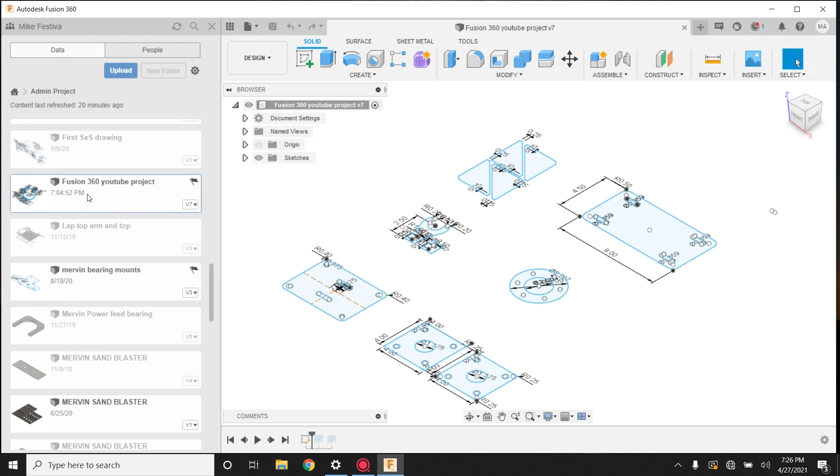Alright, so I just opened up Fusion 360, like we're just starting off, and we had some existing files. We're going to access those files right up here, show data panel, and here we go. This is a file. Left click twice on it. There's our existing file we already had. You're going to hit top view over here, and if for some reason you hit the wrong button, you can turn it. We're actually looking straight onto the file, so you can use these arrows over here to figure out where you're at and rotate it, things like that.

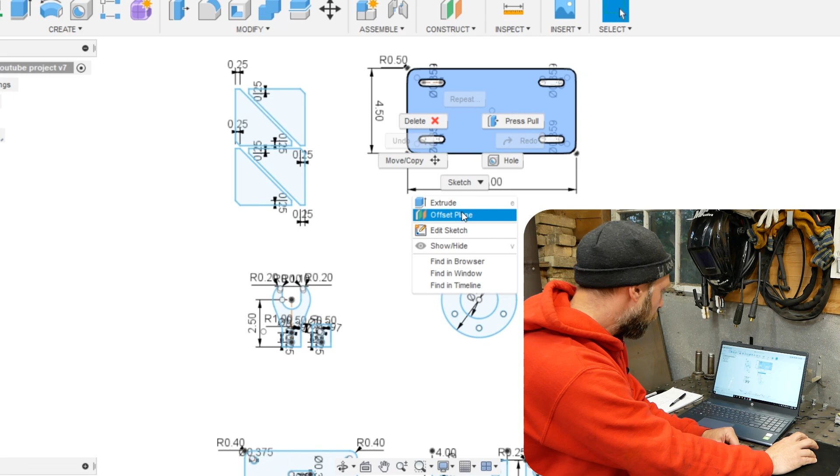So here's some existing files we already had drawn, and what we want to do now is go over on top of any of them, right click once, and go down to edit sketch. We push that. Now we can actually change dimensions on these parts and draw them up. This is the flange we're going to actually draw. 6-bolt flange. So we're going to go over here to our tools.

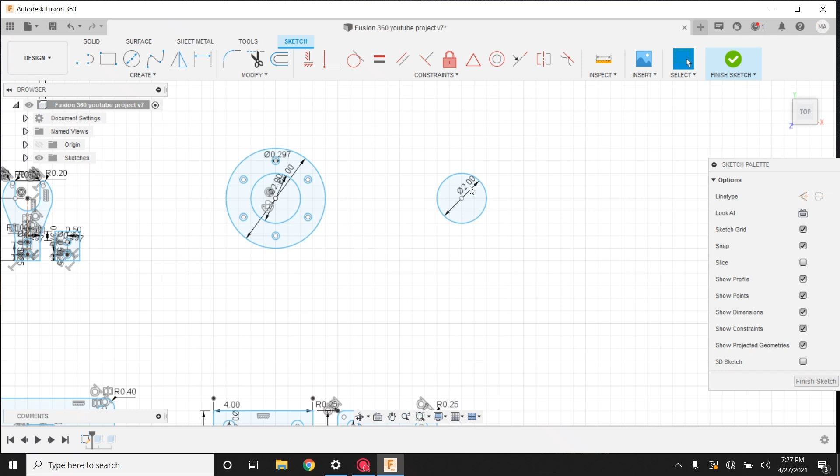We're going to go for center diameter circle. Click that. We're going to come over here, and we're going to make that 2 inches. Push 2 and then enter. And then we're going to go over to our line tool, and hit X to create a construction line rather than a drawing line. Zoom in a little bit. We're going to come up 1.5 inches. Enter. Then we're going to use escape to take that tool off.

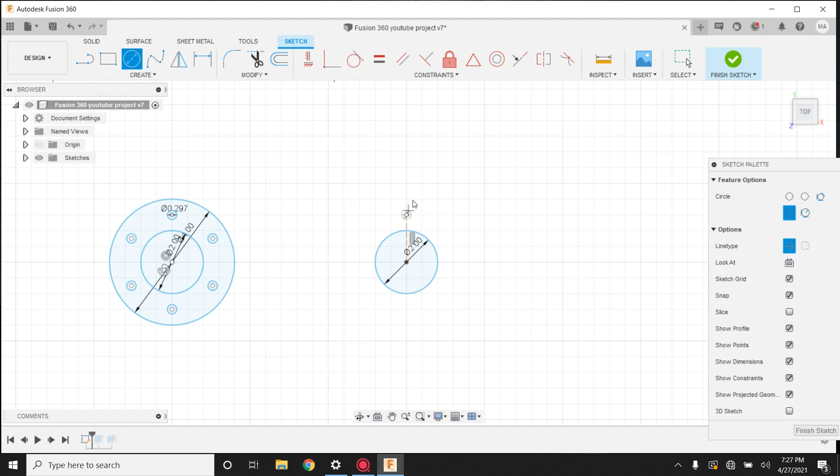And then we're going to go to the center diameter circle again, right on that little end point of the construction line. Backspace, 0.297, enter. We don't want that construction line for the future, so we're going to click on it, and we're going to hit X. Now we got a draw line. That's good.

Now we're going to go up to center diameter circle again, click on the center, pull it out to whatever you want. We got a construction line again. I need to toggle that off later. We want to do 4 inches, 4, enter. Click on that. There we go.

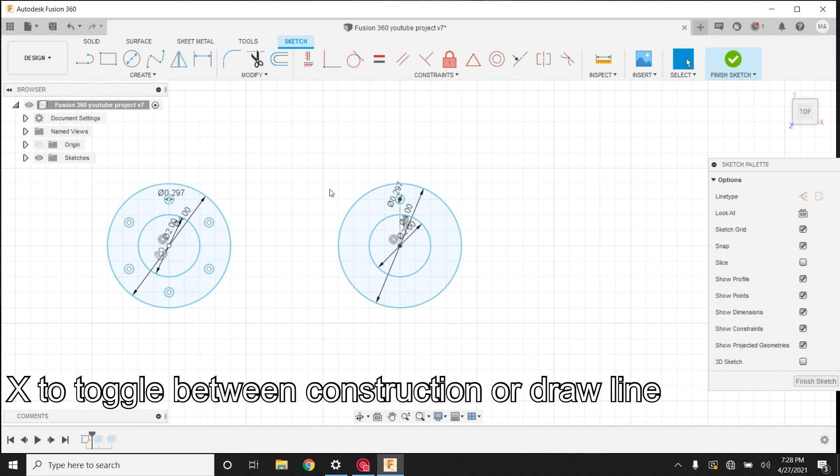So now we're going to go down to the drop down to create. We're going to go down here. Last time we used a rectangular pattern. We're going to go to circular pattern. Click on that. Now over here it says object, center point. So we actually want to highlight this first circle we made up here. That's going to be our object. And then we're going to select center point.

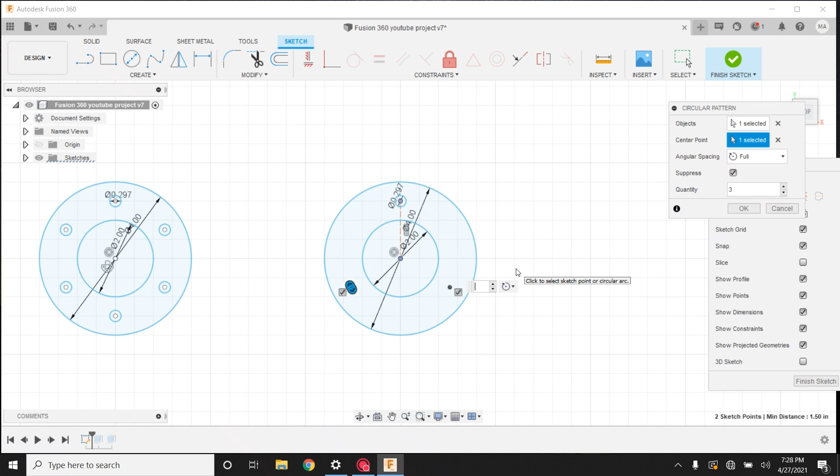And select that there. Now how many holes do we want to have in this flange? It's set for 3. Let's do 6 here. Simple as this. Hit 6. There's our array of 6. Now we can hit enter or OK.

Okay, so what happened there was it actually just highlighted the center points. We don't want just the centers on there. We'll go back through that again. I'll show you what we did different here. Circular pattern. Want to highlight just the outer ring of this. Okay, select center point.

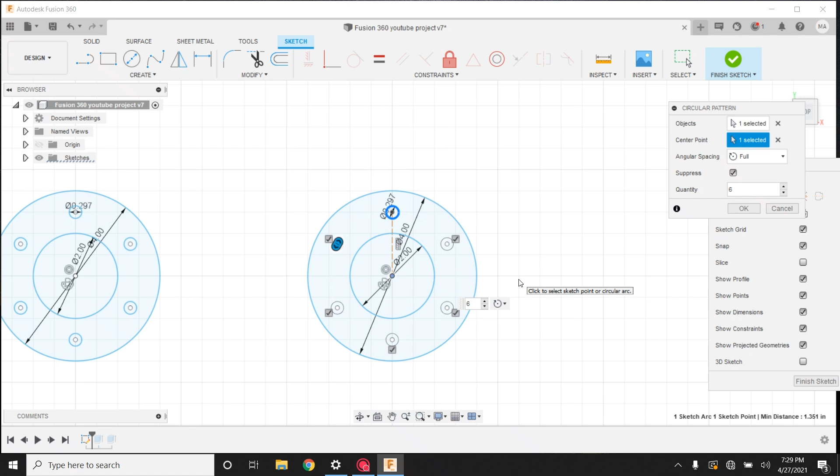Gonna go for 6. There we go. Now we just hit enter or OK. There we got our hole pattern. So that's as simple as that.

We can go back through and push T for trim. Left click, trim that off there. Trim the other construction line. Just kind of cleans up the drawing quite a bit. So there we got a flange. Hit escape to take that tool off.

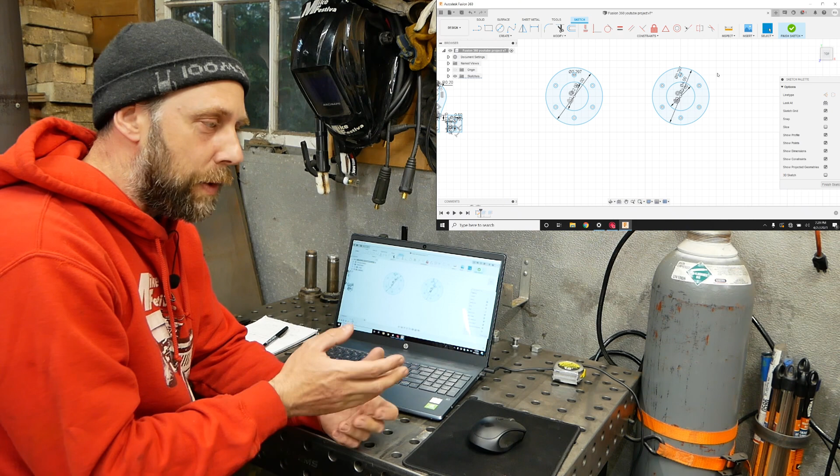Simple as that. So as you can see, you can make simple little wheel spacers if you're working on a project or a quad or anything. You want to make some 1/4 inch wheel spacers for bigger tires or wheels on a car or anything. Hydraulic tank flanges, whatever you want.

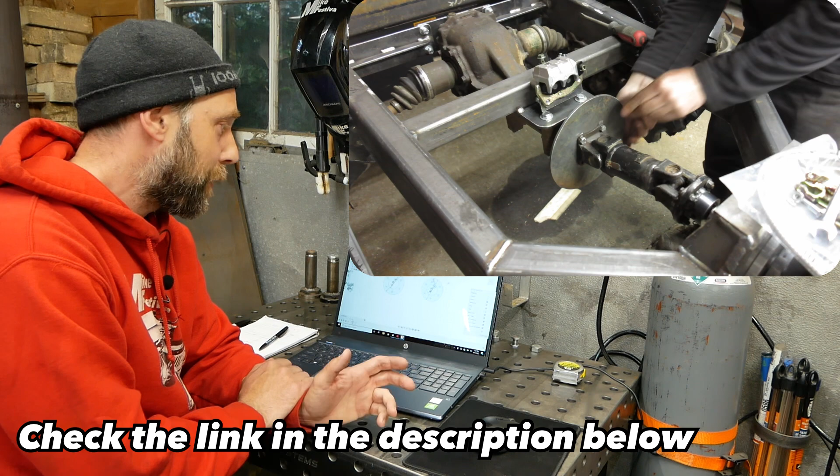It just gives you the idea how to use the center tool here for circular patterns, the hole patterns, and you can put any number of holes from 3 on up, I think. So it's a pretty useful tool, and I've used it quite a bit.

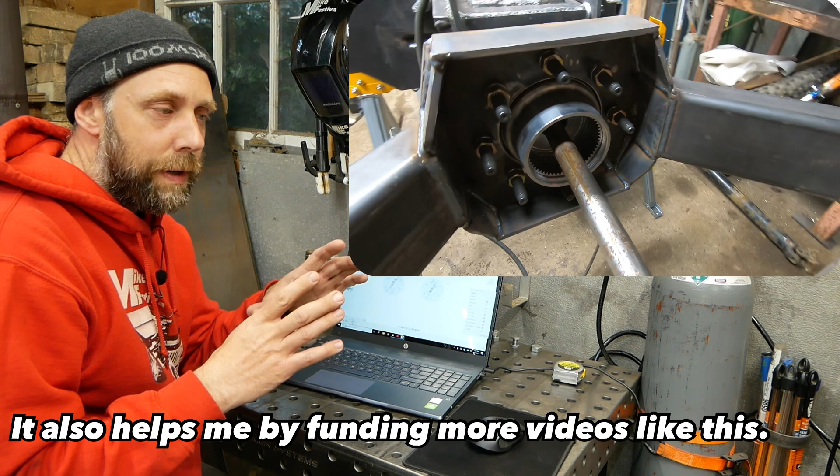I used it for actually making the center point for the articulated dump truck, because I used a Ford F350 center bearing. So I had to cut basically what would be the pattern of a wheel pattern for that. And it worked out great.

All right, we will move on to another part here. We're going to start working on a Predator slotted engine base for maybe a go-kart chassis or anything like that if you want to mount a 6.5 horsepower engine on. So we'll get to that next.

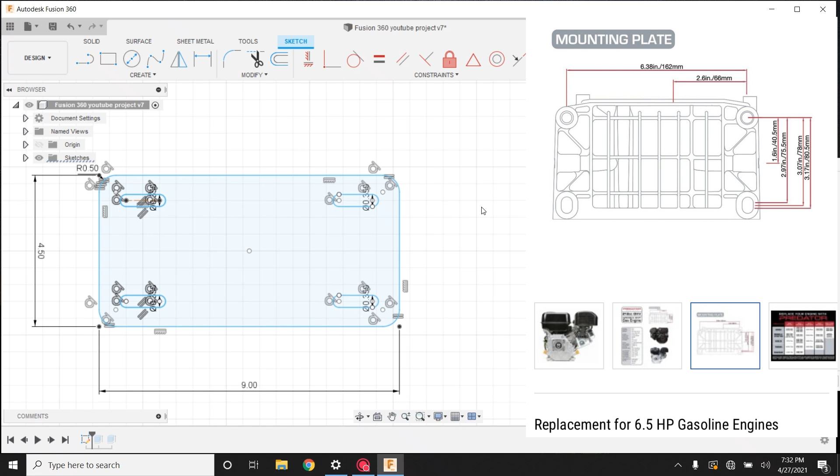Okay, so here's the part we're going to draw now. It's an engine plate for a Predator engine. I got on the Harbor Freight website and they actually had bolt pattern specs, and it was 6.38 inches by about 3 inches. So we're going to make a slotted engine plate that will support an engine if you're working on a go-kart or anything.

So we're going to go over to the side. We're going to go up to create, and down to slot. Center slot is the one we want. So we're going to go over here and left click. Going to bring this out to 1, enter. Now you don't see a slot on there. That's because we got to open it up and widen it here.

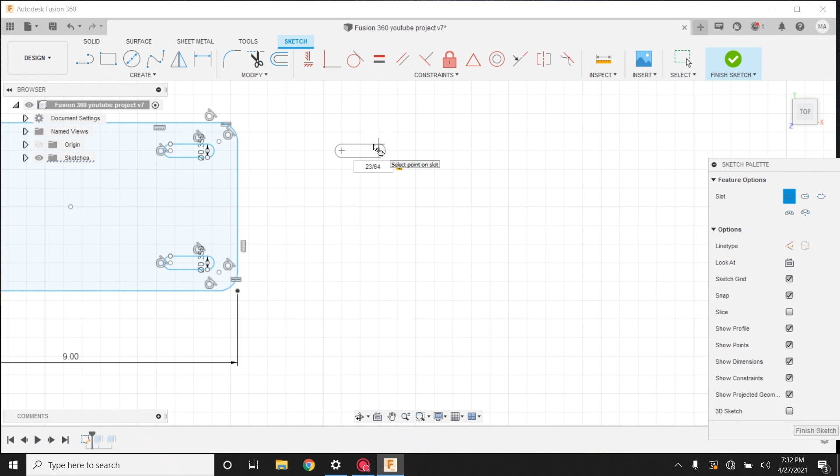So what do we want to make this? I think we're going to make this 23/64ths. Enter. Now we got that first slot there. Now what we're going to want to do is actually copy it and move it over.

So we're going to zoom in here, and left click on that once. Now we're going to right click it once we highlighted it. We're going to go to move. We're going to highlight every one of these 4 parts. Now we're going to hit copy, and move it over in this direction.

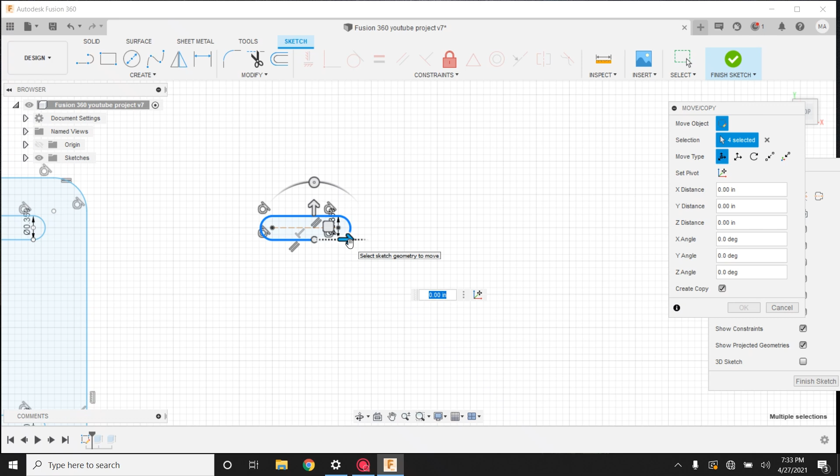And we're going to move it over 6.38 of an inch. So 6.38, enter. Now we got a slot moved over here. So now we're going to highlight all these, and we're just going to copy up.

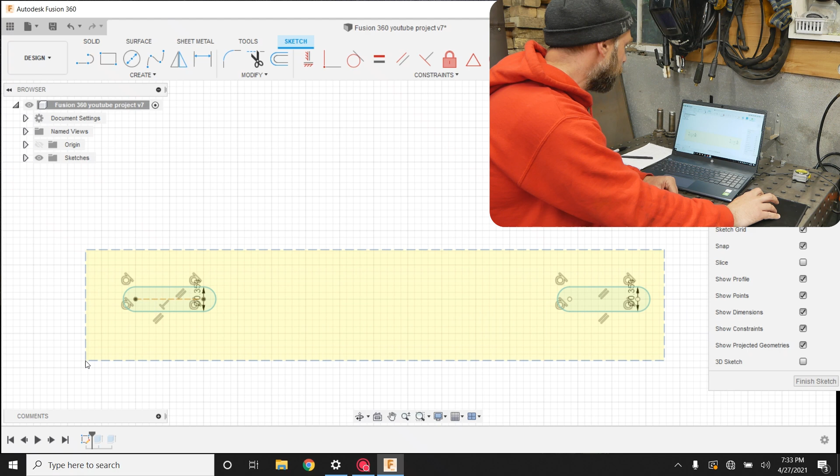Instead of clicking 8 individual pieces, we're going to left click and hold and drag and box these in. Now we let go, go over the part, and right click to move. Now we hit copy, then hit the arrow up, and we want to come up 3 inches. We hit 3, and then push enter.

So there we got our slot pattern here, which is super useful for building anything you need adjustments for belts or anything like that. So now we're going to make our overall engine plate 4.5 inches by 9. We're going to go over to the line tool, and hit X for construction line.

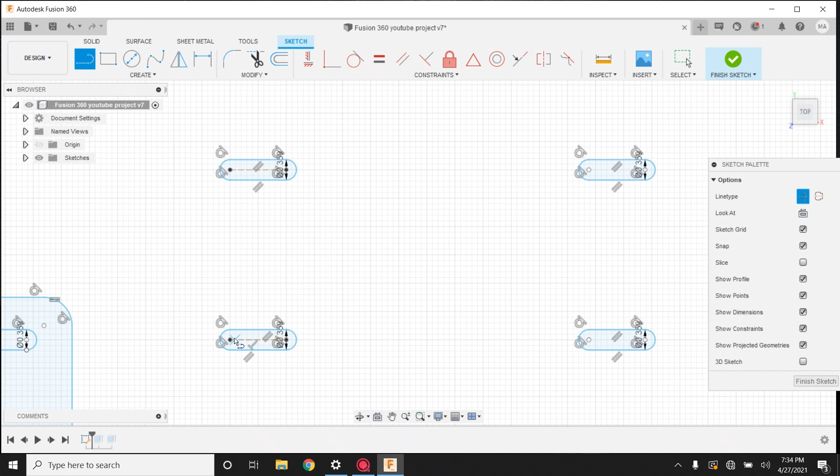We're going to come over to the side hole right here, and do a cross right to this. So we got a nice angle sloping from that hole to that outer hole there. Now we're going to hit escape to remove that drawing tool. And then we're going to go back to line again.

We're going to find the center. Fusion is pretty good because if you come up or down the center, we'll see that means we're in the center of that line. So I'm going to just drag this straight up. Anywhere in here is fine, and hit left click again. Now escape to take that tool off of there.

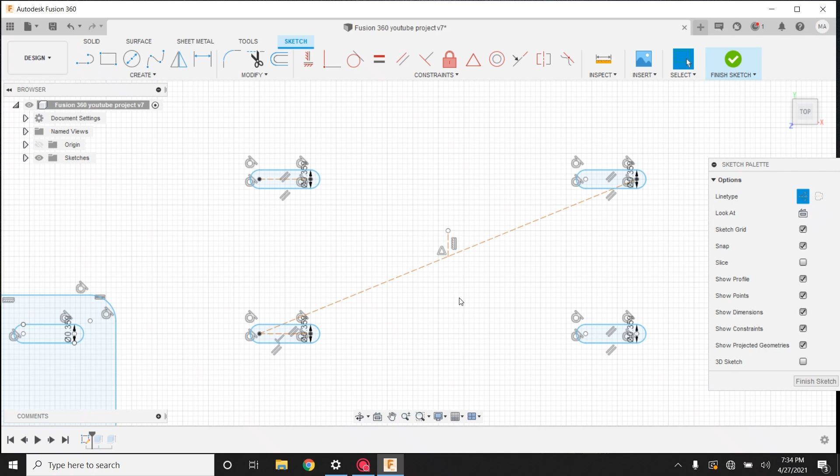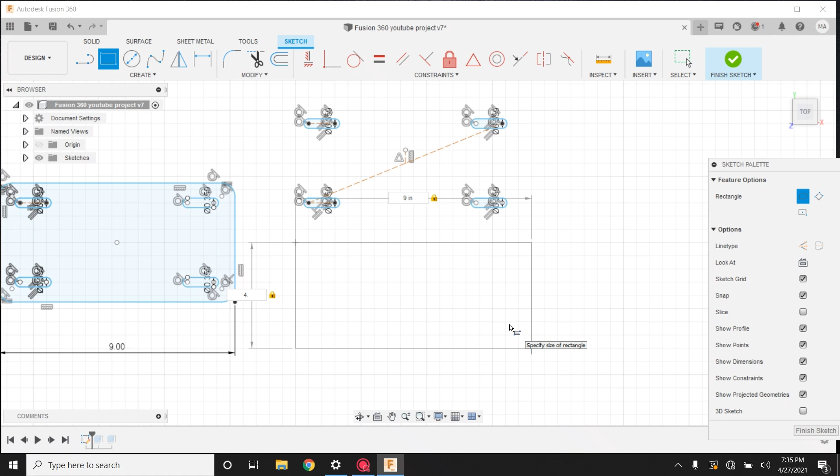Now what we're going to do is we're going to draw a rectangle. So we're going to draw our 2-point rectangle tool. Going to click on that. We still got a construction line on over here, so I'm going to hit X to take that off. I'm going to click anywhere around here. We're going to drag this out. We want it to be 9 inches, so we're on that box. We're going to hit 9, and now we're going to hit tab on the keyboard, and we're going to put 4.5, enter. Now we got that part there.

Now we got to get it over here. What we're going to do now is we're going to go back to create. We're going to go to point. And see, we just found the center of that line. We're going to want to find the center of this line. Once we do that and the computer recognizes it, we can bring it up and it's going to tell us where the centers of all those are. We're going to left click once. Now we added a little point there. Going to push escape. Now we're going to left click and drag over the whole entire box and then let go.

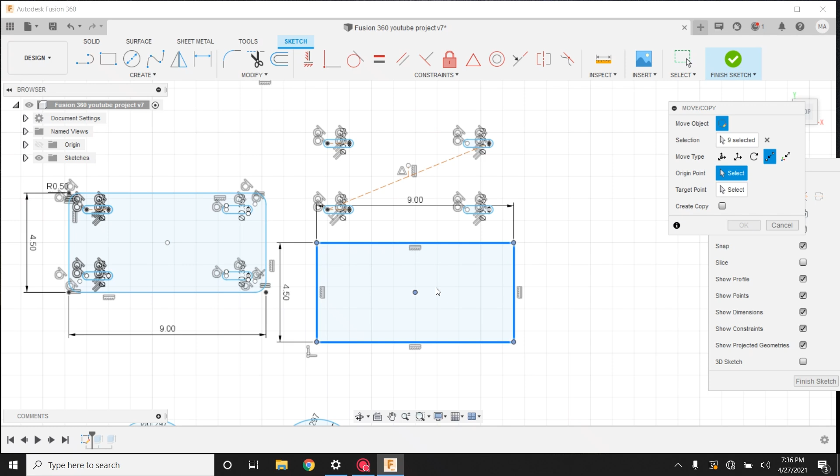We're going to push right click, move, and then up here we're going to want to go to this with the 2 dots and the arrow going down to them. Once we click on it, it says point to point. An origin point, we're going to select this one we just put on there, and then it instantly drops us down to a target point, where we're going to want to not hit that node right there. We're going to hit this one right in the center. There we go. We got the engine plate right over the slot, so we're going to hit OK.

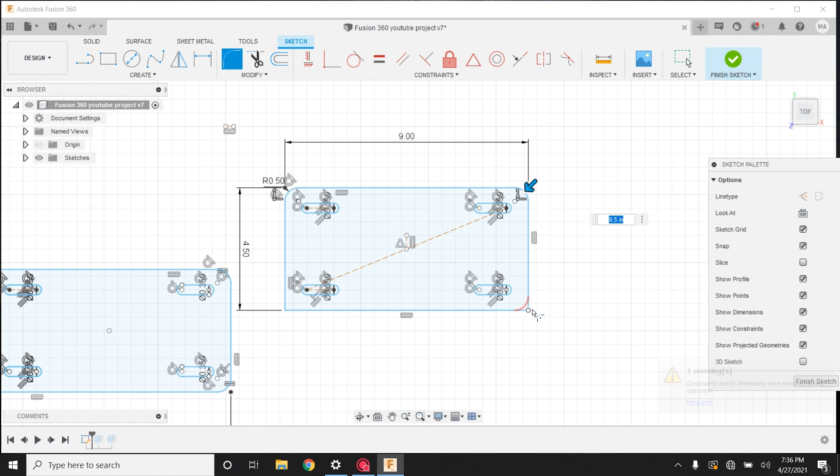Now last we want to do is come up here to fillet. We're going to fillet these corners. We're going to go over here, left click again, 1/2 inch. We're going to go around all the corners here. Keep clicking them, left click, get to the last one, left click, and hit enter. So now we got our engine plate.

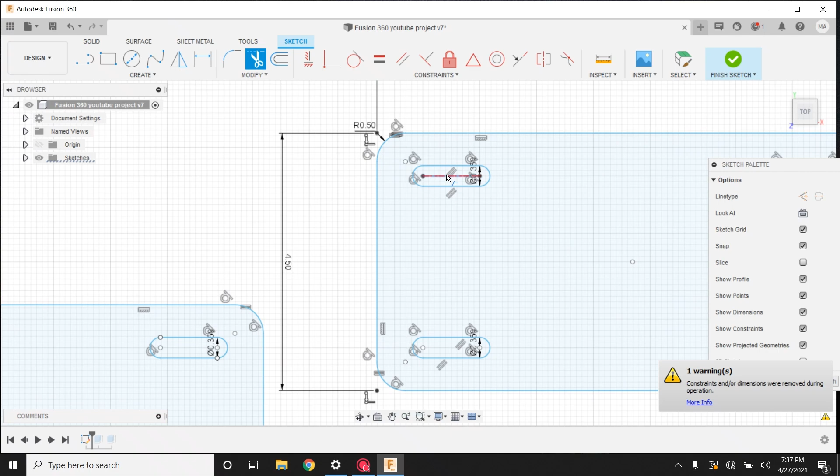Now we can just go through and use the T for trim tool. Trim these. As you guys see, I'm using more shortcut hotkeys because I'm thinking you are all probably using these by now a little bit, and if you're not, it speeds things up quite a bit. Here's one more thing. Clean that up. Now I'm gonna hit escape. Now we got our engine plate there.

So simple as that. Basically, you can bolt your engine on here and you can slide it forward and back 1 inch. If you want to slide it forward and back 1.5 inches, you just make the slots longer and make the engine plate a little bit bigger. Simple. I hope those little tools really help you out. And finally, we're going to get on to making some gussets, and I'll show you how I like to nest them, because sometimes you'll make multiple gussets on a project and you can nest them around your other parts, and it'll give you the simple idea how we do it. Let's get onto those gussets next.

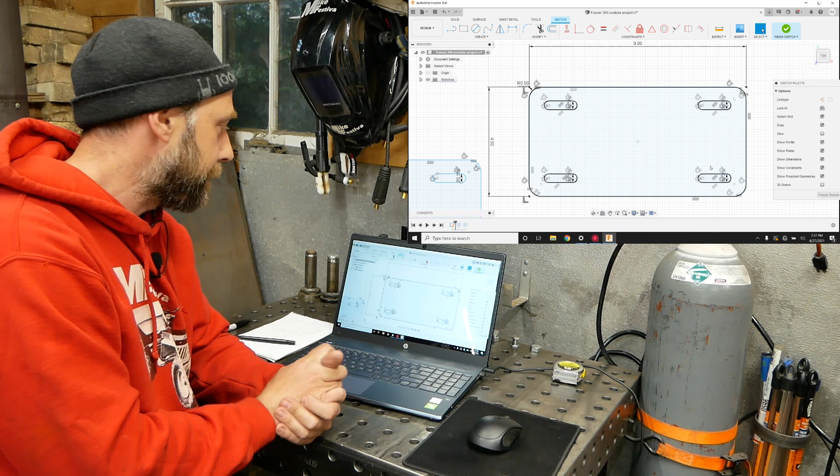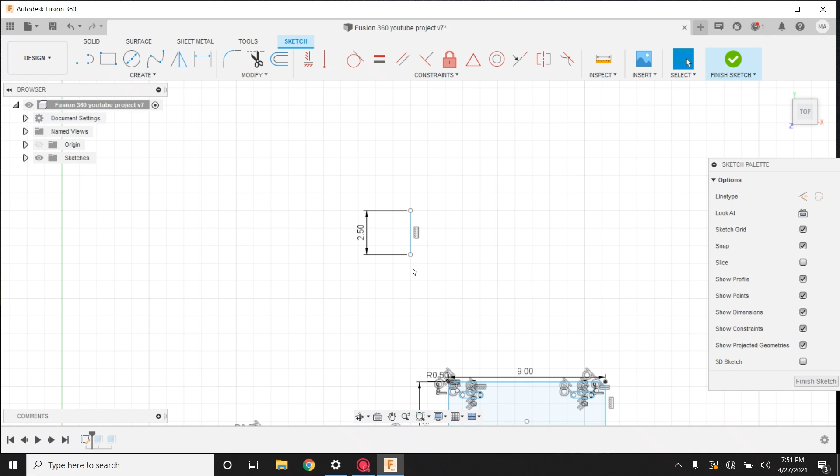Okay, so we're going to draw some simple gussets here, and I'll also show how to copy and paste them. I like to do this for nesting parts and other parts and pieces, so we'll get to that now. Going to go up to line, going to go anywhere on here, going to come down 2.5 inches, so 2.5, enter. I'm going to start using the hotkeys a little more. I highly recommend you start using them too. So instead of going up here for line, we're just going to start pushing L on the keyboard. Much faster.

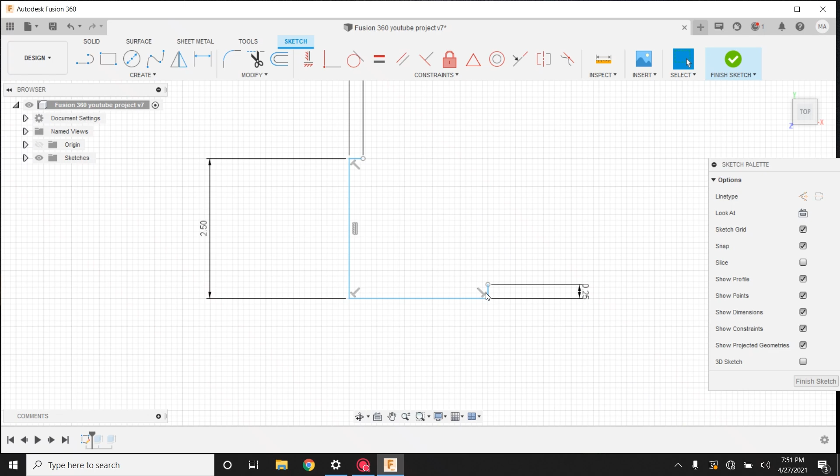2.5, enter. Going to come up 0.25, so 1/4 inch, enter. L, 0.25, enter. Now we'll zoom in. One thing I want to point out about zooming in and out, wherever your cursor is, it will zoom in. So say we want to zoom into this measurement, we put it right over it. And as we roll the roller button in, it will zoom right into that location.

You want to back out. So if you're zooming in and you're like, why is it going off my drawing? It's because your cursor's off the drawing when you're rolling. So wherever you point that, if you want to zoom into this corner, you just roll it in while you keep your cursor pointed right over there.

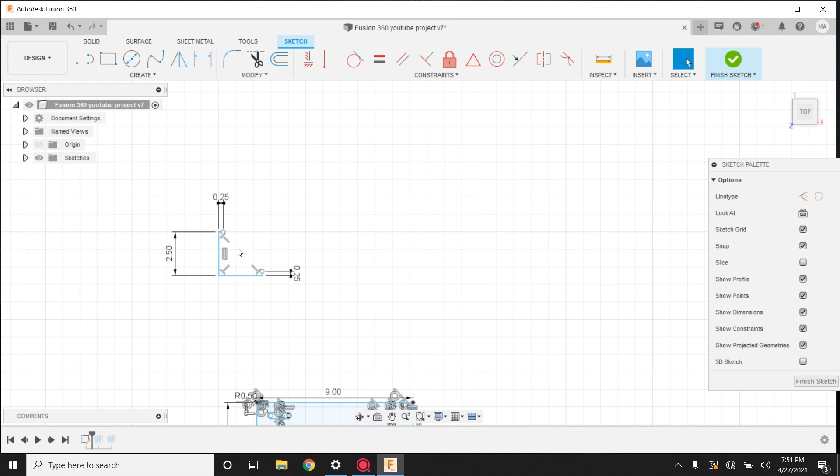So that's a helpful little tip right there. So we're going to zoom in. Now we're going to put L on here again. We're just going to do a 45. Left click, drag down. There we go. We got a gusset. But one thing I want to do is I want to fix this corner up.

And the reason is, if you're actually welding on, say, 2 plates together, like an L plate down here and a plate up here, you're going to run a bead of weld down the center of that thing, or right where the plates come together. And if you have a 45 in there, you're going to have to grind off the inside edge of the 45, or you're not going to be able to weld in that area. I'd much rather do a whole weld down that, and I would just like to modify my 45 so it sits above the weld. So we're going to take care of that now.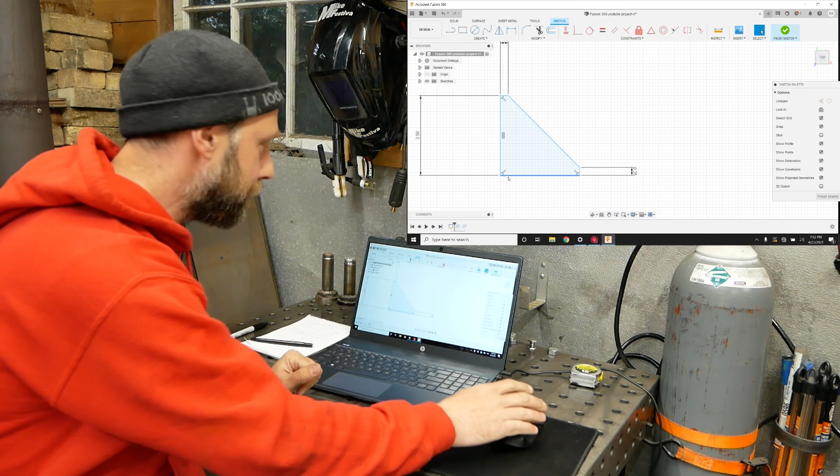So zoom in here, and what we're going to do is push L for line. I'm going to come back to, say, around about like this. I'm not going to get too scientific on this measurement. There we go. Now we're going to hit the escape key, and then we're going to push T for trim. Trim these 2 lines. Again, I'm using more hotkeys on this one. Hopefully you guys are keeping up with that. So I hit the T for trim. Now we're going to push the escape key to get out of there.

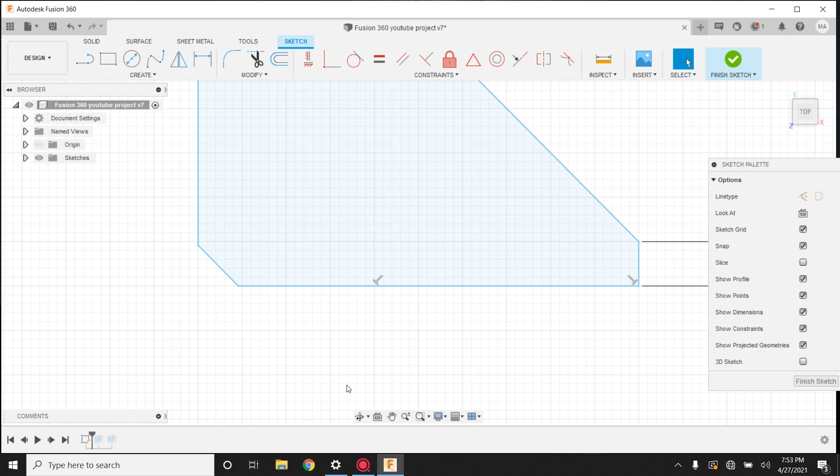There's our gusset. Keep in mind, these are just reference measurements. We're going to scoot these out of the way. We can even take them off over on the side over here. I think there's one of these. Okay. So what we're going to do now, we're going to go over to the side over here, higher than this location and further off than that. And we're going to left click and we're going to hold it. And we're going to box this whole section in. We just drew this gusset.

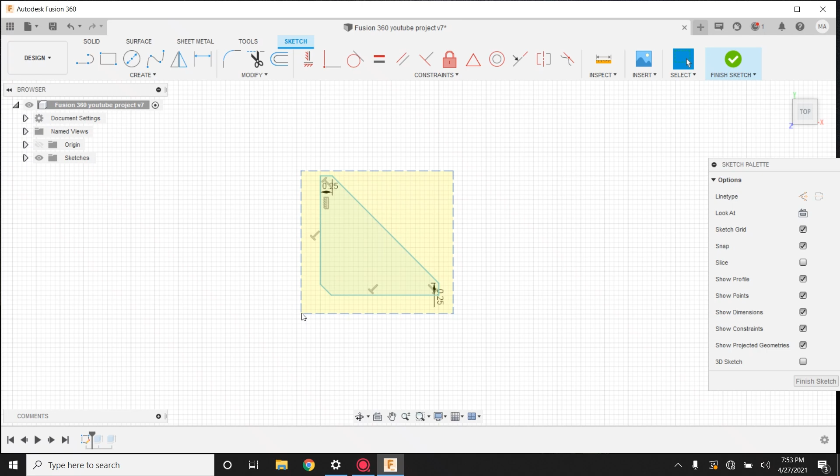Once we got the whole thing boxed in, we're going to let off, left click, and then we're going to go over the part and we're going to right click. Now we're going to go right to move/copy. Going to come down to the edge here. Sometimes this opens up as a full box, sometimes it's just a little strip, so you have to roll down on the side. Mine is a full box here, but you're going to hit create copy. And then here's a little tip for you guys.

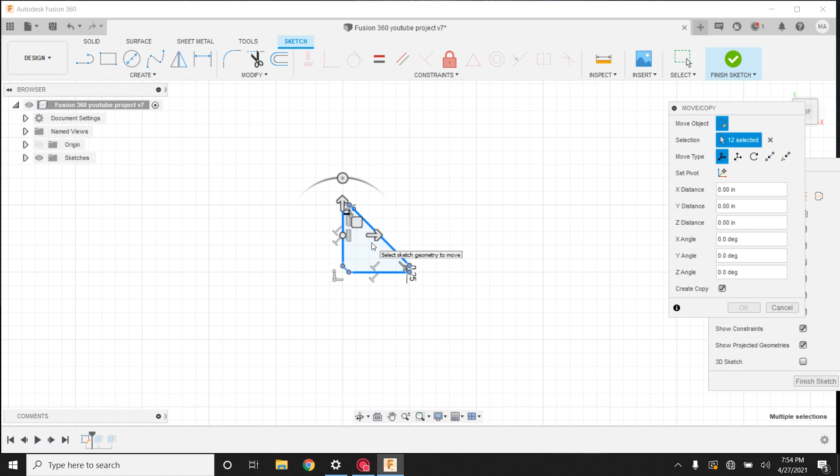If you zoom out and you grab one of these arrows, it's going to make larger jumps to the grid. If you zoom in, it's going to make finer movements. So that's a little tip. If you use that arrow, it's only going to go side to side. If you use this arrow, it's only going to go up and down. This is freehand move, so you can move it anywhere you want. And then you can also put in a measurement, like we can backspace, put 2, jumps it over 2 inches.

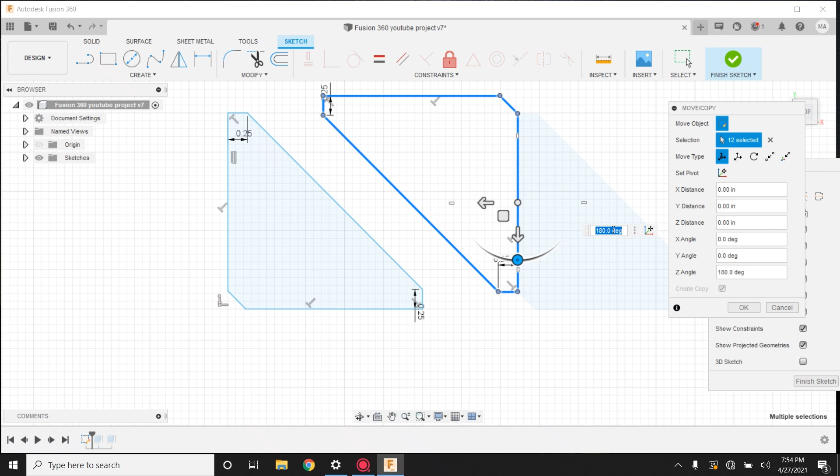Then this rotates it. So we're going to grab this part right up here and rotate this whole piece. We're going to rotate 180 degrees, it says it right there. And we're going to bring this thing in. Going to line this top and bottom up of this gusset here, just to kind of be efficient with metal. And we're going to slide this over. I like to leave, say, maybe about an 1/8 inch or so

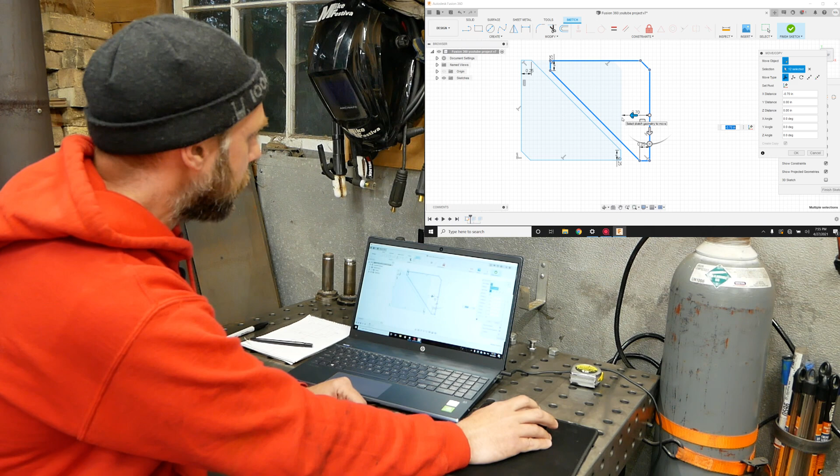between the parts. When I'm cutting them, I found that my cuts will turn out a lot better if I actually leave a little bit of wasted strip of metal down the center of them. So the plasma will come through here, cut this gusset out, and then it's going to move over to this side and cut this gusset out. It's going to leave a little strip of metal, a little less than an 1/8 inch.

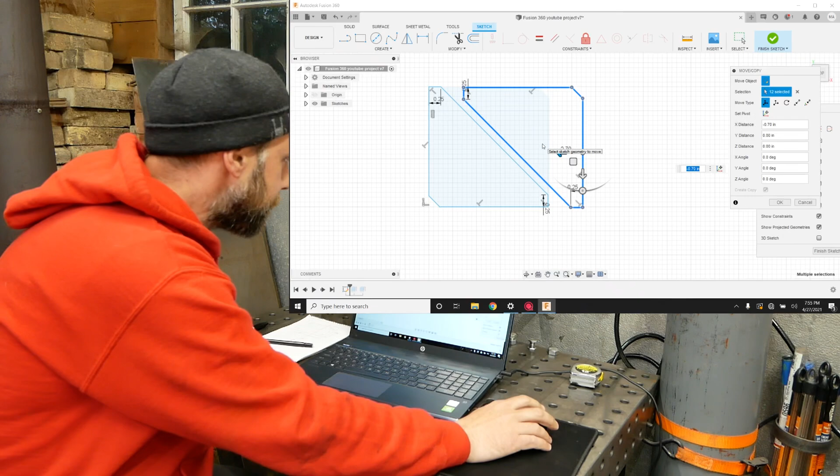I find that if you nest your parts up really close, the plasma comes down, cuts one of your parts out, comes over to the other side and cuts the other part out down that same cut line. You get a lot more slag in your parts and more of a jagged edge. So I'm all right leaving a little bit of wasted metal on there to get nicer quality parts. So we got it where we want. We're going to hit OK.

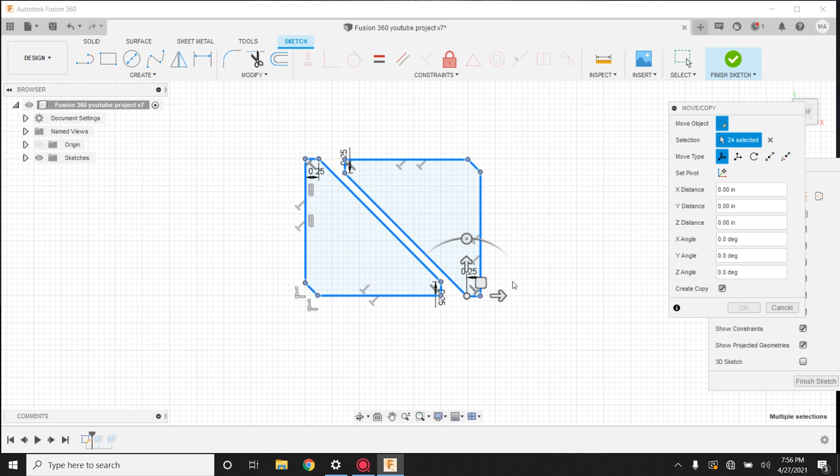Then what we're going to want to do is we're going to actually want to grab this stuff again. So we're going to go over up above the corner here and we're going to push left click, hold it down. Going to pull it over, box this whole area in, let up. And we're going to go over any of the parts and right click. Move copy. This is repetition. Hopefully it's kind of working with you guys here from memory. Going to go over create copy. And we're going to slide this up.

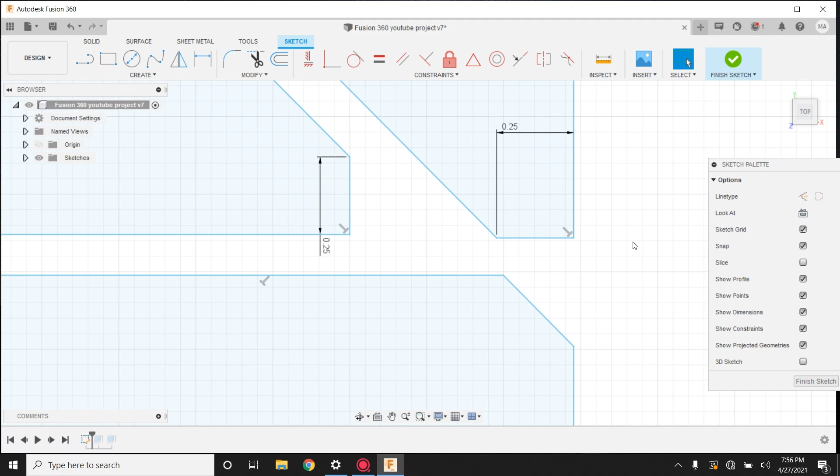Let's see, what do I like this at? Let's go for 2.62. Yeah, that looks good. We're going to hit OK. So we got our 4 parts right here. So that's how I like to nest things.

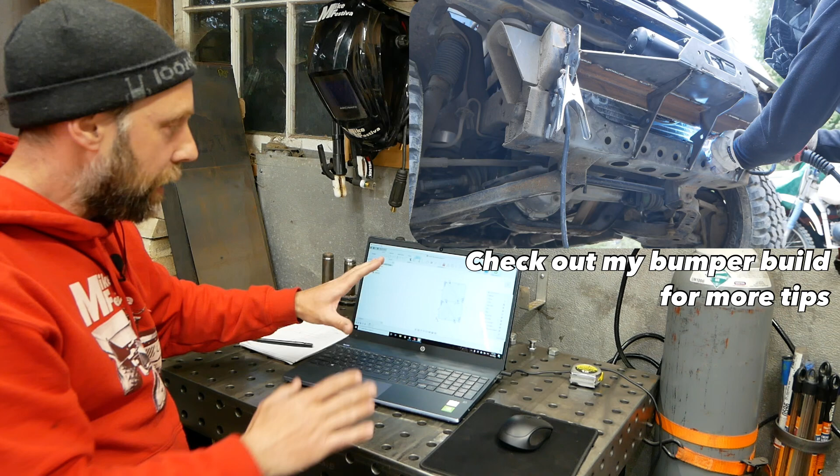So if you imagine you make a lot of complex parts and pieces, and there's some openings and gaps between a bunch of different parts, you can nest these things in however you want. You can grab a gusset, rotate them, fit them in wherever. So what I like to usually do, if I want like 6 or 8 gussets on a bigger complex drawing, I will draw 1 gusset on the side. And say you got little slots and open areas in the drawing, you can fit each gusset.

You can copy it, make a copy. You can slide it down, rotate it until you fit it in between 2 other parts. And then you hit OK and you go back, grab a gusset, copy it. So you can always keep your original one on the side and you can slide it around and fit it in and nest it in all your other parts.

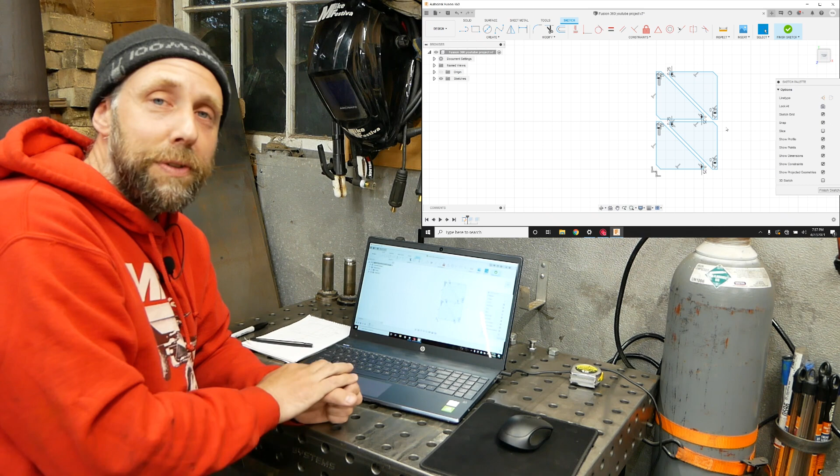I don't mind manually nesting. I think this program has a nesting feature in it. I've never used it. I find that I can kind of set the whole metal grid up how I want and I don't mind it. It doesn't take very long. So that's how you nest the parts here.

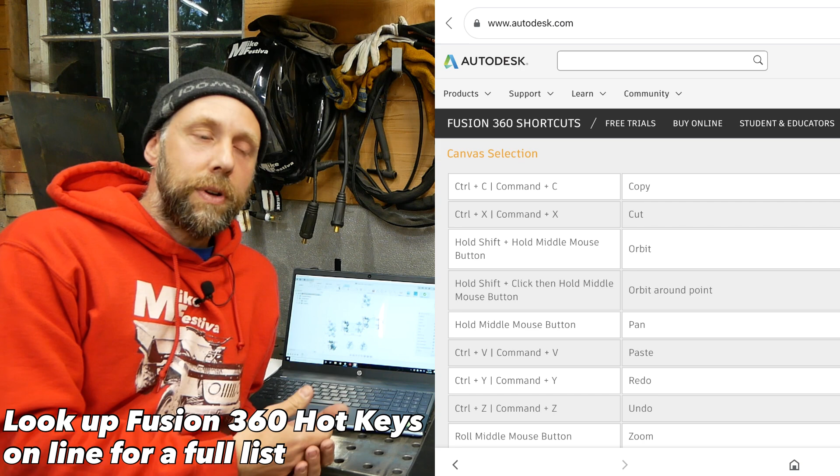So that about wraps up part 3 for Fusion 360 2D drawing for beginners. I hope you learned a lot. I highly recommend going back through and looking over these videos, especially the first and second if you're totally new to this. I go through the steps a lot slower on those videos so you can follow along and draw out the parts. This one I'm using a little bit more shortcut keys, so you need to get kind of comfortable with that. This is a little bit quicker pace, but you'll get faster and faster at it. So highly recommend going over these and just drawing them.

You can go through the parts and finish up, and if you want to delete the parts, you box them in like I just did on here with the left click, and you can go over any of the parts that you box in, right click, and then go down to delete, and it will take all those parts that you just highlighted off there. You can just keep drawing them again if you want.